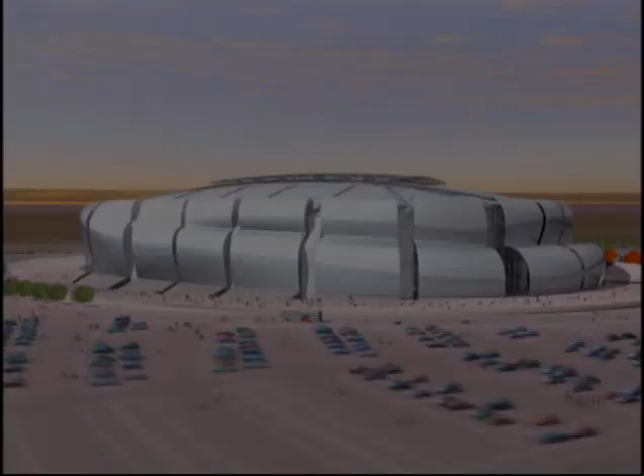In the summer of 2006, the Arizona Cardinals Football Club will open their season in one of the most technologically advanced stadiums ever built. With a bold, modern design, including a retractable roof and a roll-out natural grass playing field, the facility will set the standard for football stadiums around the world. It's going to be like nothing else in this country as a stadium, as a piece of architecture.

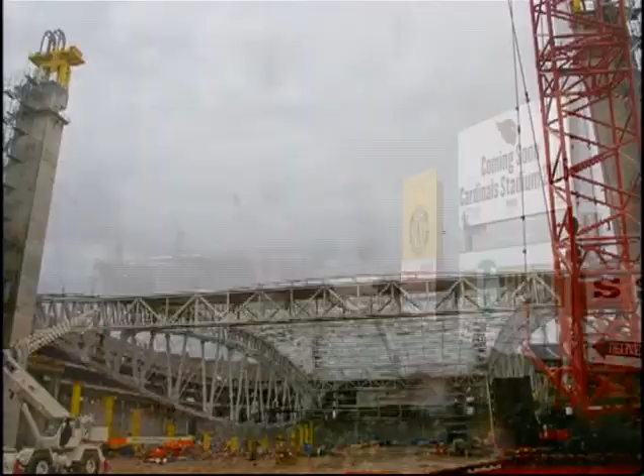In February of 2005, with the stadium nearly halfway complete, Hunt Construction Group was faced with the giant task of raising two massive Brunel trusses, nearly 200 feet in the air. All right, we're lifting, fellas. The trusses, with a combined weight of 11.2 million pounds, form the backbone of the roof. It's in good shape. That is one hell of a structure out there.

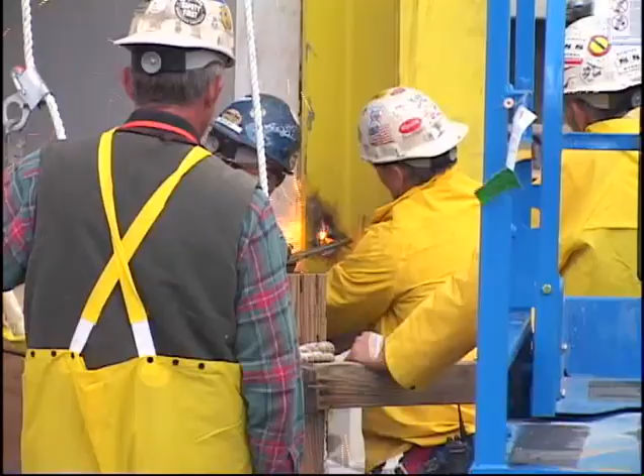Over 5 cold and rainy days, a handful of engineers and ironworkers descended on the West Valley of Phoenix to attempt what would be the largest roof raise in North American history.

Today is the beginning of a new era. The landscape changes. We begin building an icon for our state. Today, Arizona wins. As the oldest continuously run professional football franchise in America, the Arizona Cardinals have never had a stadium to call their own.

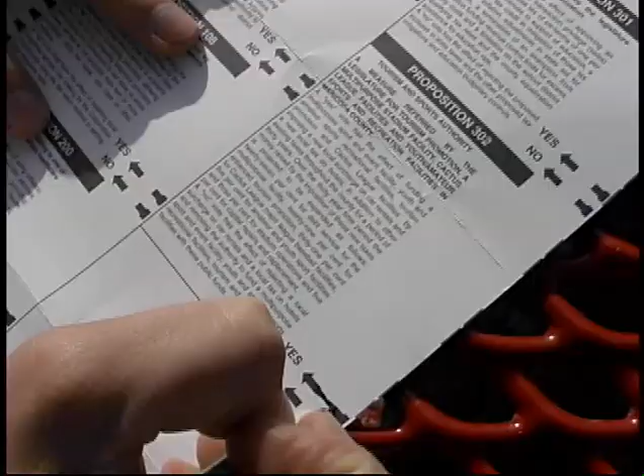In 2000, the Cardinals scored a major victory when Maricopa County voters passed Proposition 302, which increased hotel and rental car taxes to help fund the stadium project. While the funding became a reality in 2000, the vision for a new stadium began to take shape a few years earlier. In 1997, Cardinals ownership Bill and Michael Bidwell explored the possibility of retaining an internationally known high design architect for their future stadium project.

And their search uncovered Peter Eisenman, not only one of the most influential architects of the 20th century, but a passionate football fan. I didn't know anything about all this going for a high design architect, right? Some guy called me up, said, "You remember me?" I didn't remember him. He said, "Are you interested in football?" Right? And I said, "Yeah, I'm interested in football. I'm going to 2 games this weekend."

He said, "Uh-huh. Well, I represent the Arizona Cardinals, and this is the 50th anniversary of their championship." And I said, "Hey, I saw those guys play, and I can even name you the backfield," right? And I did. I named the backfield just off the top. I don't know how I did it, but I went boom, boom, boom, boom, boom, like that.

The next day, this guy calls me back, and he said, "Can you be in Cincinnati on Sunday to see the Cardinals and the Bengals game?" And I said, "The Giants are playing at home." And he said, "Yeah, but the owners would like to meet you." I said, "Yeah, I'll be there."

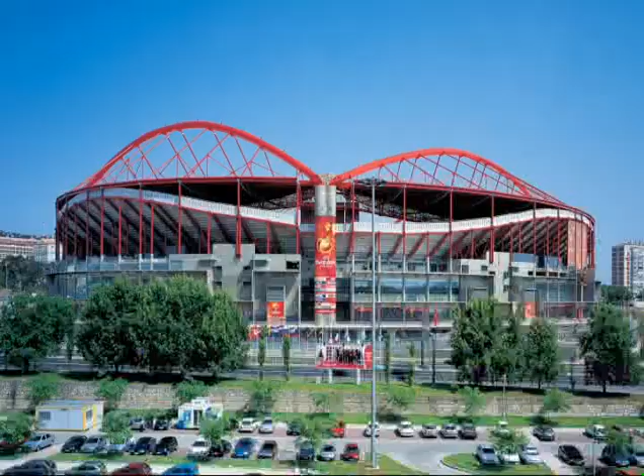As the project evolved, the Cardinals expanded the design team by retaining the services of HOK Sport, the renowned sports architecture firm that has designed more NFL stadiums than any other firm. HOK has been at the forefront of the shift from the cookie-cutter multi-sport stadiums of the 60s and 70s to the more sports-specific stadiums of today.

In the mid-60s, there was the idea, because cities had 2 professional sports teams, that they could coexist, and for a while that worked because the city then had to spend its dollars on one building, and since the seasons didn't overlap to any degree, that worked. But with the needs of each specific sport, really purpose-built buildings, ballparks for baseball and football stadiums for football, really became a necessity for a variety of reasons.

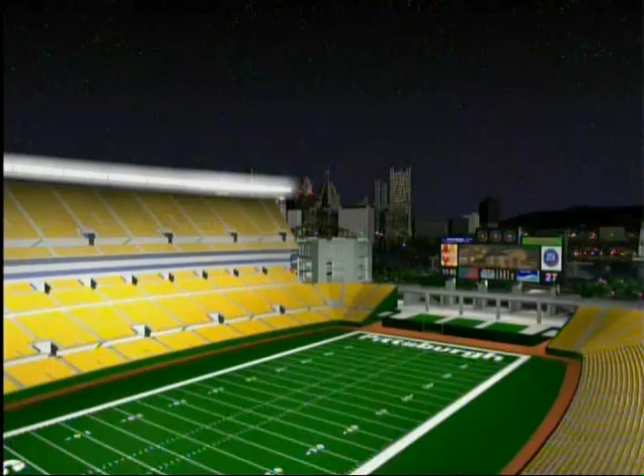Contrary to stadiums of the past, designers of modern venues have set out to create structures that do more than just accommodate thousands of people. Rather, they're seeking to create buildings that are a reflection of the city and the teams they're built for. With this concept in mind, the Cardinals set out to build a stadium that would not only reflect the unique beauty of the Arizona desert, but be a significant and enduring contribution to the ever-evolving urban landscape of the Valley of the Sun.

What we as architects are very, very concerned about is that our buildings are in fact contributions to the culture of the time, that they're not just an attempt to remember a kind of fictional golden age, but they make today special and important. While Eisenman's design has a modern look and feel, elements of Arizona's Native American culture and unique desert landscape are evident in the stadium's exterior shape. He drew inspiration from two common features of the Arizona desert, the barrel cactus and the snake form.

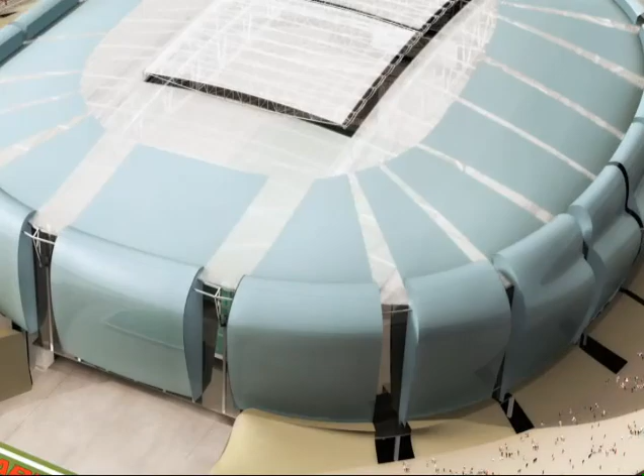When you see the stadium, it ends. There's this end, and then the thing radiates around and gets flatter, gets thicker and flatter. That's the residue of the snake form, and incorporated with it is a mandala form, which is a center radiating out. So these spokes are like a mandala or a spiky cactus, any kind of organic form that radiates from the center.

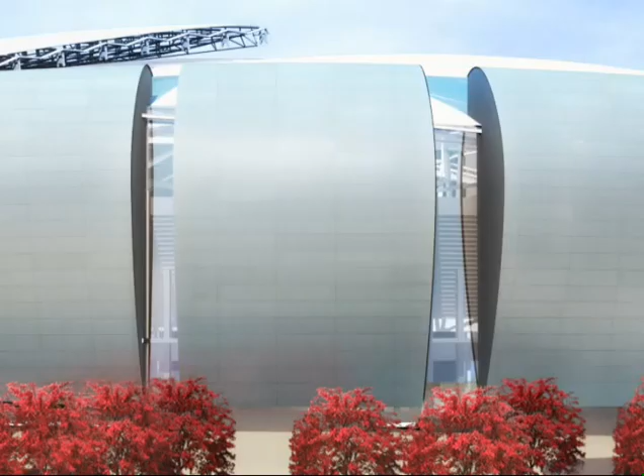One of Eisenman's primary challenges was to have a high design concept throughout the project without interfering with the fan experience. He was able to accomplish this by using a unique exterior that features alternating metal panels intended to reflect the shifting desert light alongside magnificent vertical glass slots, allowing patrons a spectacular view of the horizon from any level of the interior.

Between my seat and when I leave my car, that's where architecture comes in. And I think from this stadium, you can be both inside looking in a concourse, looking at the game, and looking out at the buttes and the mountains. I think that's a great feature. Not many stadiums have that possibility.

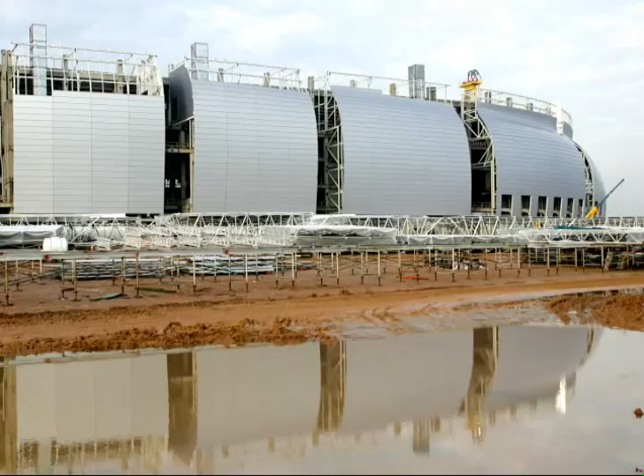During the early stages of the stadium's metallic skin installation, its unique reflective nature was already apparent in many ways. Depending on the angle of the skin, it's very reflective of a gray day, a bright sunshiny day with the blue sky, or if there's a tremendous amount of vegetation, there'll be a greenish tint to it. Sunset, you'll find a different color to the building, so it's always changing. It's a little more organic in that sense, and it's somewhat alive.

In addition to the exterior skin, the retractable roof was another major component of the design. While recent stadiums have incorporated retractable roofs, this design called for the roof panels to move along an arc, an engineering first. The operable roof is the second one that we've done for an NFL building, Reliant being the first,

but this takes some steps which are different. It would have been easy just to repeat sort of a flat roof, flat tracked approach. The operable portion of the roof takes more the shape of the building itself, and so the panels actually flow down the sides of the building and then together in the center.

Working on covered sports stadiums is nothing new for the structural engineering firm of Walter P. Moore. They were involved in the construction of the world's first covered sports stadium, the Astrodome, built 40 years ago, as well as two of the most recent retractable roof stadiums, Minute Maid Park and Reliant Stadium in Houston. In designing the trusses that would serve as the support structure for the movable roof in the Cardinals Stadium, Walter P. Moore drew inspiration from a 19th century engineering legend.

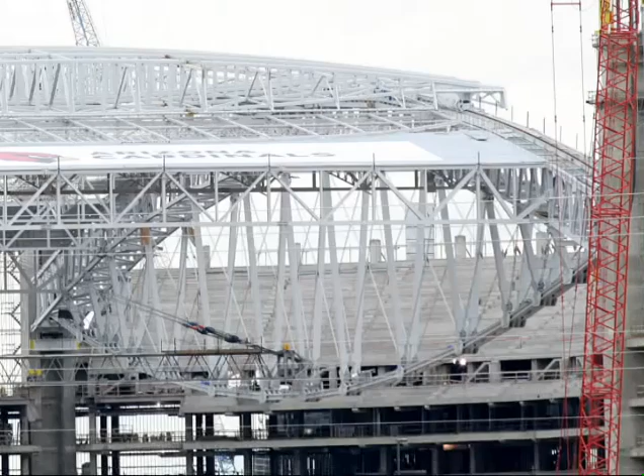Knowing some of the engineering history here, we noticed as this roof form was evolving that these trusses were very similar in shape to a bridge called the Royal Albert Bridge, completed by the very famous British engineer named I.K. Brunel in 1859 in England. So just to introduce a little sense of history into the project, we dubbed these the Brunel trusses.

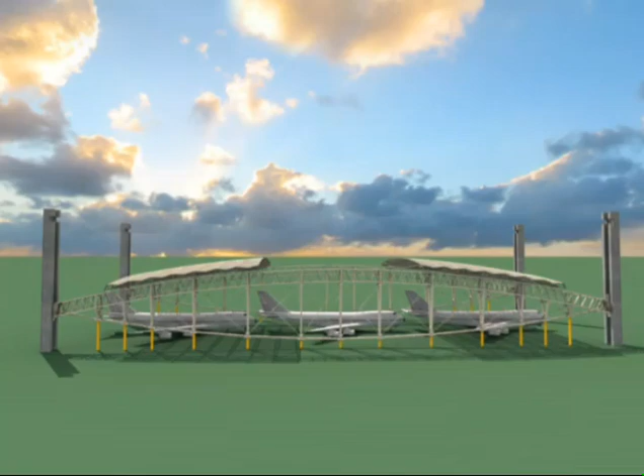The two Brunel trusses provide a rigid line of support beneath the tremendous moving loads of the retractable roof. They are lenticular in shape, similar to the shape of a football, and measure 87 feet at their tallest point. Over 700 feet long, each truss is just slightly longer than the length of 3 Boeing 747s. With the shape of the Brunel trusses, Walter P. Moore was able to create a roof support system that was cost-efficient and visually dynamic.

Engineers had to balance Eisenman's architectural ambition with physical and budgetary boundaries. The geometry of this roof system was very important to him, since all this structure is exposed, and when you're sitting there, at halftime, if you don't like what you see on the field of play, your eyes are looking up and you're looking at the structure. He wanted that to be a pleasant experience, and he wanted it to look right.

A lot of times the aesthetic vision has to go through a process of reconciling with the physics of having a 700-foot long span roof, and also some of the functional considerations of the stadium venue itself. The primary driving element on the Brunel trusses is how deep they are at the center. That really drives the economy, and where we ended up was at an 87-foot deep truss that allowed the aesthetic vision of the architect to have a fairly low profile roof on the top. It has enough depth for us to design an economical truss, but yet keeps the bottom element out of the sight lines of the bowl itself.

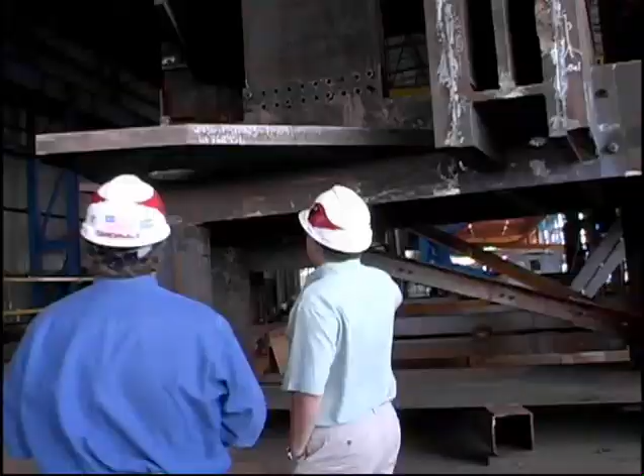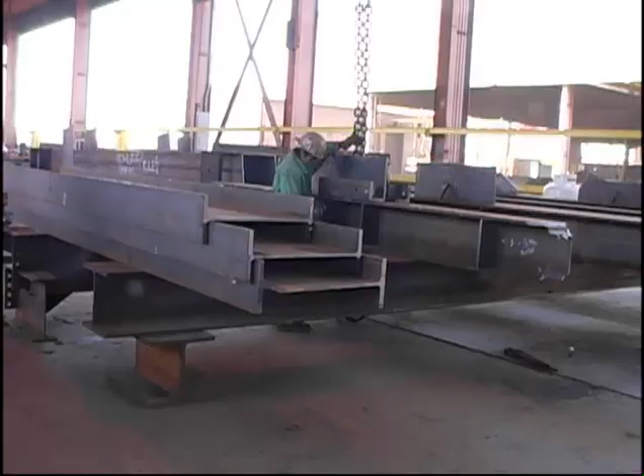The next step in the assembly of the roof support was the acquisition and fabrication of the steel used to construct the Brunel trusses. Designers targeted a specially milled high-strength steel made by Trade Arbed of Luxembourg, one of only 2 companies to produce this type of steel worldwide.

Engineers like to use that in long-span structures like this because they get a savings for strength versus weight. So for the same weight as a non-high-strength steel that would be, say, produced domestically, they can carry a lot more load over a certain distance. So there's obviously a price premium, but overall there's a big tonnage savings. And in any long-span structure, especially one of this complexity, you want to keep that weight down to a minimum.

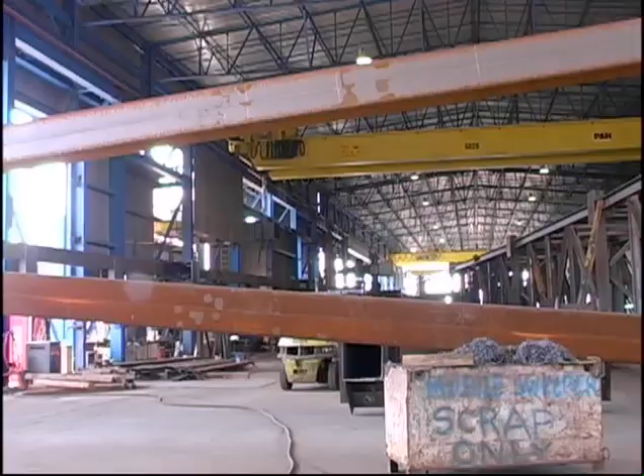Phoenix's Schuff Steel, the project steel fabricator and erector, began to assemble the trusses in 20 by 20 foot sections at their own facility before transporting the sections to the stadium site. Once at the site, the sections were welded together atop temporary shoring towers on the stadium floor. Assembling the Brunel trusses on the ground dramatically improved efficiency.

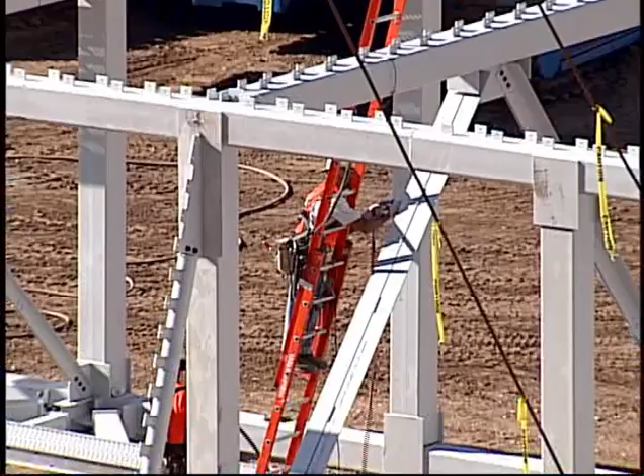If you were going to build it in the air, you had to have much more of the concrete structure in place to support the shoring towers and the ends. So what we looked at was a way to get about 60% of the concrete work in place, get one end of it up and out of the way, let the 2 Brunels start from the north end and work their way to the middle, while we were finishing the concrete work at the south end. So building them on the ground made a lot of sense. We got started probably 3.5 to 4 months earlier than you would have done it if you were waiting for the entire concrete frame to start.

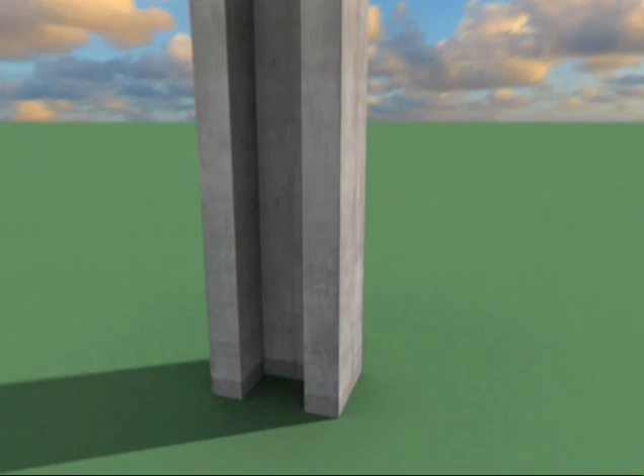The support system for the 11.2 million pound roof assembly consists of 4 high-strength concrete super columns, one at each corner of the stadium. Each column measures 171 feet tall, 17.5 feet wide, and nearly 12 feet deep. The dimensions of the columns required 1,050 cubic yards of especially mixed high-strength concrete.

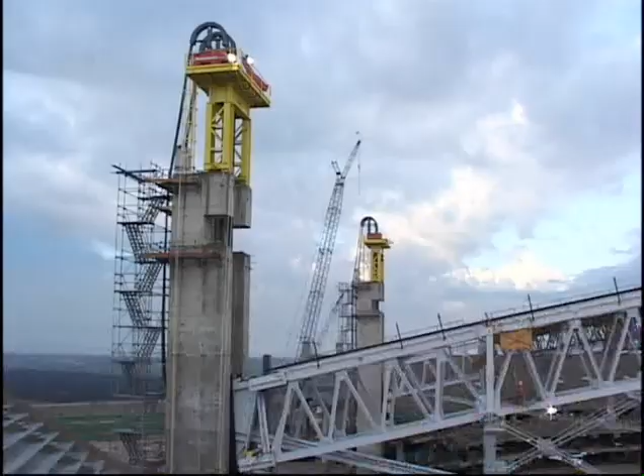As the structural engineer of record for the concrete work on the project, TLCP oversaw the design and construction of the 4 super columns. We use a 7,000 psi strength concrete, where typically residential construction would be more in the 2,500 to 3,000 psi. So it's a high strength mix to give us the strength that we need to provide the support for this lift and for the serviceability of the building.

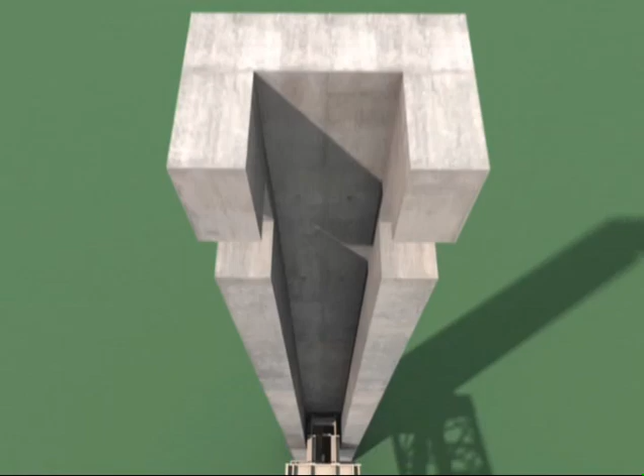The super columns were engineered with the roof raise in mind. Designers incorporated a channel which runs the entire 171-foot height of each column, allowing the Brunel trusses to have an unobstructed and guided path up the columns to their ultimate position, 156 feet above the stadium floor.

The super columns are designed actually to support the lift. That's why the notch is in the super column, to allow the Brunels to be lifted to the overjack position. And the notch is there, then the support girders will be slid into place. And once they come down, sit on the girders, then the columns are there for the service support, or the support of the roof for the life of the building.

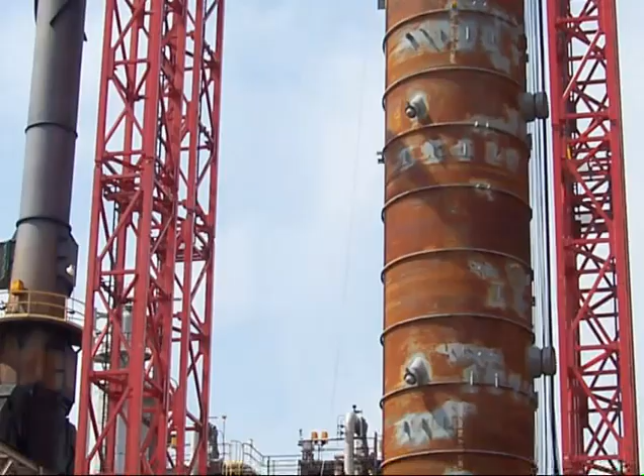The company contracted to perform the lift of the Arizona Cardinals Stadium roof assembly is Mammoet, a Netherlands-based firm that specializes in lifting and transporting heavy structures. Overseeing the lift for Mammoet is Jack Toll, who has worked on several similar projects throughout the world. Actually, we have it pretty easy on this job. Our responsibility is just to go up with it. It's the other companies that are involved that monitor the deflection of the roof, the super column deflection, that have an influence on what we do.

Mammoet gained worldwide acclaim for its role in the retrieval of the Russian nuclear submarine, the Kursk, which had sunk to a depth of 108 meters on the floor of the Barents Sea. The centerpiece to the successful salvage operation was Mammoet's advanced computer-controlled strand lifting systems, designed for safe, precise, and heavy lifts. Mammoet plans to use the same system to lift the roof assembly for the Cardinals stadium.

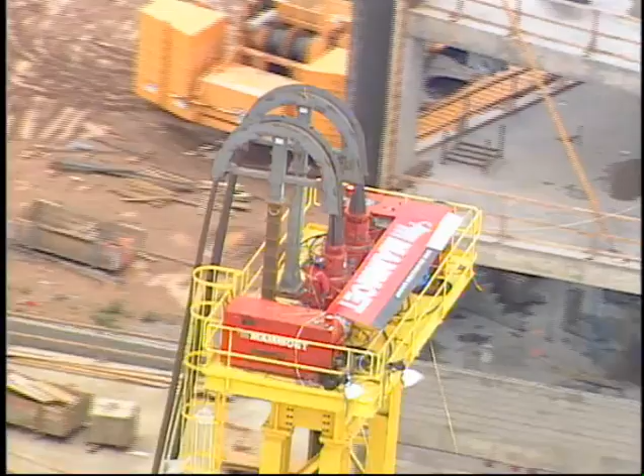The strand jack is a hollow hydraulic cylinder that uses a gripping system consisting of wedges and cables to lift or lower massive objects. The jacks on this project contain 54 tubes, each housing an individual steel cable called a strand. Attached to each strand are two gripping wedges located at the top and bottom of the cylinder. The gripping system is similar to the hand-over-hand motion used to raise a pail of water from a well.

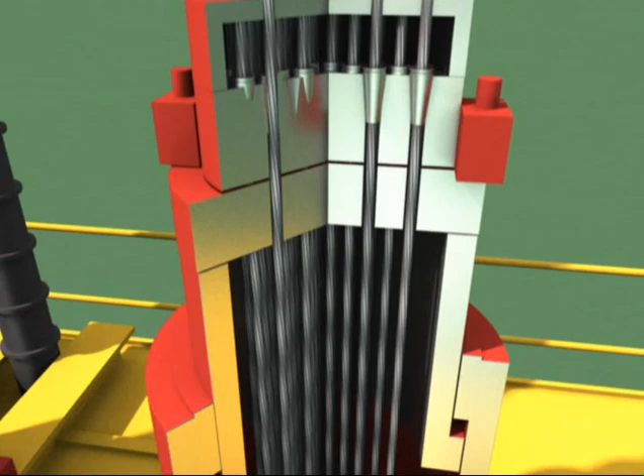When lifting, the hydraulic cylinder extends, forcing the top wedge into a cup, causing it to tightly grip the strand. As the cylinder expands and completes its stroke, it raises the strand and the object that it's attached to. At the end of the stroke, the bottom wedge is engaged, securing the strand, while the top wedge is released, allowing it to be repositioned for the next stroke.

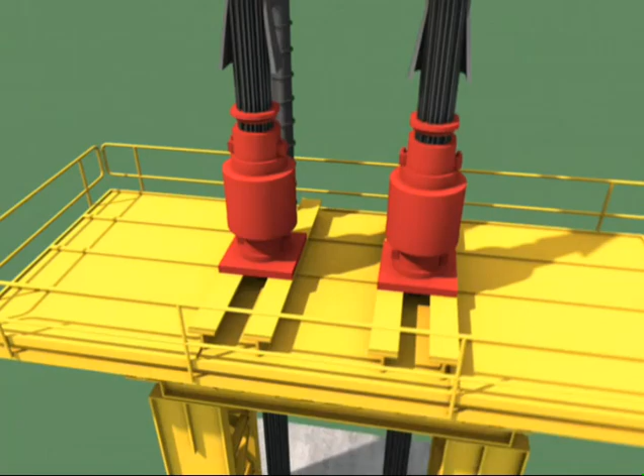Each super column, and there's 4 total, contains 2 strand jacks. Each have 1,000 US ton capacity. The roof is estimated to weigh 5,500, and we have 8,000 ton capacity, so there's plenty of safety margin in it. Each pair of strand jacks is mounted upon yellow temporary jacking frames atop each super column. The 3-day plan calls for all 4 corners of the roof assembly to be raised at a synchronized rate from their initial bearing point at the main concourse level to the notches near the top of the super columns.

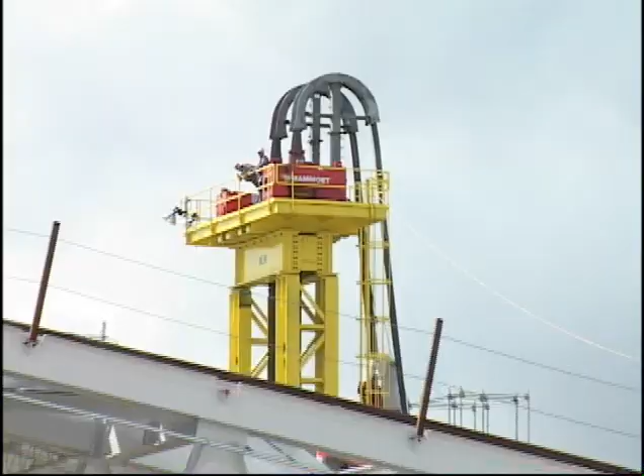Once we get the go signal, our operator will use a computer that drives each jack separately and keeps control of each jack. And the computer makes sure that each jack will not stray from the other jack. At the controls of this monumental lift is Jason Marks, who is positioned with a laptop computer inside of a small room on the upper concourse of the stadium. From his laptop, Marks is able to monitor and control all 8 jacks simultaneously.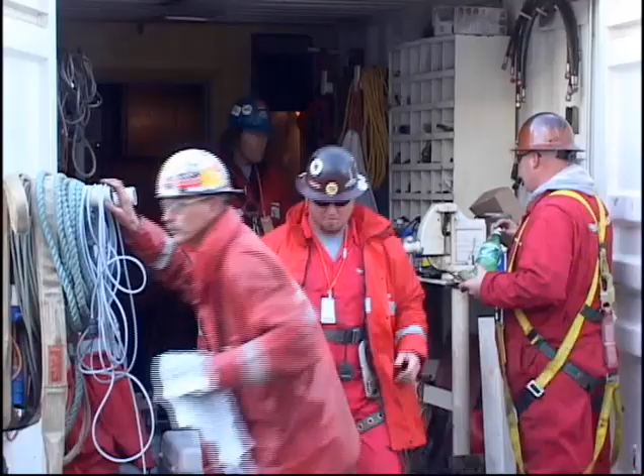His job is to raise all 4 corners of the roof assembly in unison to ensure a balanced and safe lift operation. While the cozy control room shelters Marks from the elements, it does not protect him from the creative nicknames that his co-workers have given him. I've been called all kinds of things. Because a lot of times when we're putting things together, hanging jacks, cutting wire, working, it's all different. But when it's time to get in the box and everybody starts giving me a hard time, call me box boy, mouse boy, the trained gorilla, I've heard it all. They'll come in there and walk by and throw me bananas, tell me to push the button.

Mammoet's technical expertise is not the only reason that their work is known around the world. Wearing their trademark bright red jumpsuits, their crews stand out from the typical construction crowd. With an eclectic mix of international personalities, Mammoet crews leave a lasting impression on those they work with. They're all in their red jumpsuits, and they kind of appear on the job site, and they're here for a couple of weeks, and then all of a sudden they pack up their stuff. They're kind of like a really high-tech circus comes to town. Very good group of guys. They work all around the world.

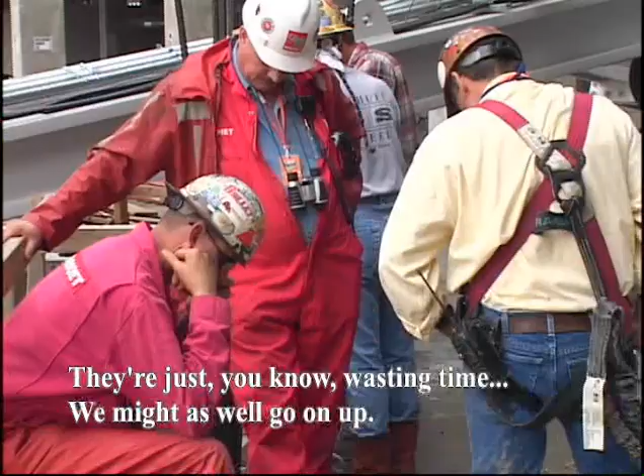They looked at us kind of like we had 3 heads once in a while, and we talked about the things we were planning for. And to see us sit down here trying to calculate inches of movement, and all they wanted to do was pick it up. And I said, why wait? They're just wasting time. We might as well go on up. I understand, you're preaching to the choir. Just hang in there for a little while longer. From the beginning, this is clearly what they do. They have the technical expertise. We couldn't be happier with Mammoet. They were everything we thought they were and more.

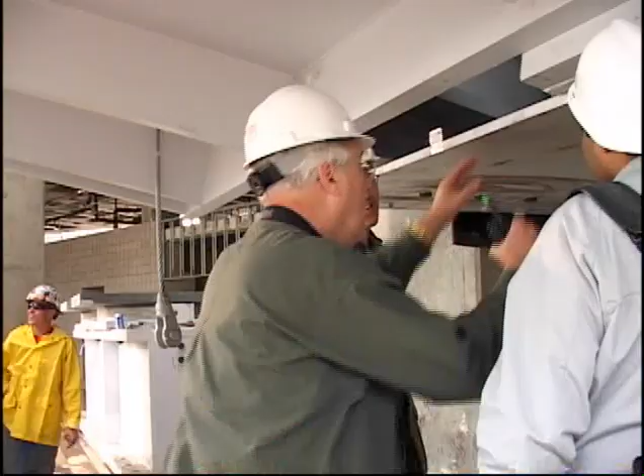As the general contractor for the project, Hunt Construction Group assembled and coordinated the efforts of the various subcontractors working on the roof lift. With over a half-dozen subcontractors involved, careful planning was essential. One of the major objectives of the 13-month planning process was to prepare the lift team for all the potential scenarios that could arise during the operation. You can read a lot of the trade journals, and you know that some of these that have gone up haven't gone so well. We pride ourselves in working with the fabricator, the erector, and the general contractor to plan an event like this and play the what-if game and try to anticipate all the problems that could come up and then get solutions for them and have them thought out ahead of time.

There's no question that of all of the long-span roofs around the country we've been involved in, this is one that has been planned in more detail than any other, and I think this project will probably set a new standard for that. Officials planned for communication flow and chain of command procedures to filter through a control room located on the upper concourse of the stadium's north side. Inside the control room, representatives from each of the key subcontractors could monitor critical data and relay instruction to field personnel during each step of the lift process.

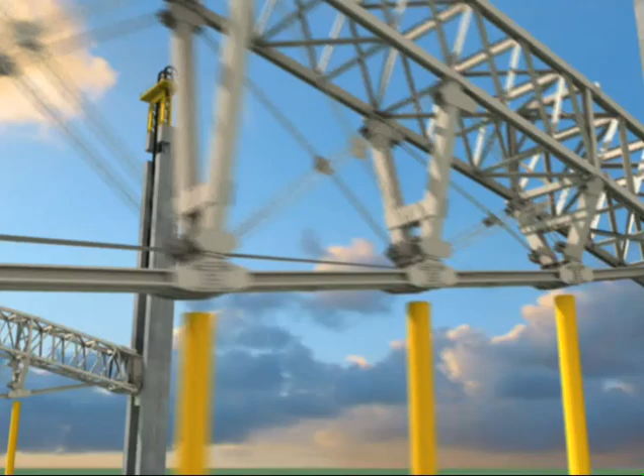The first step in the lift operation is to raise the roof assembly from the yellow temporary shoring towers, allowing the Brunel trusses to be fully suspended. Then the roof will be raised approximately 7 feet in order to attach transfer girders to the ends of the Brunel trusses. The third step is to lift the roof assembly with the attached transfer girders to the overjack position, slightly above the notches in the super columns. Next, workers will swing the transfer girders into the notches in the super columns. Finally, the roof assembly will be lowered to rest upon the transfer girders and be welded into place.

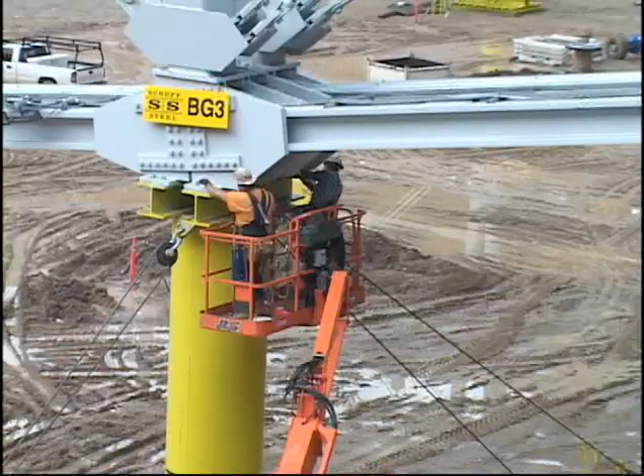First day's activities will start out down at field level. On a daily basis, I've got 5 gangs. We're calling them quad gangs, A, B, C, D, and then a roving gang. As Director of Field Operations for Schuff Steel, Ron DeBenedictis, a 32-year veteran of the industry, would lead a group of 50 iron workers during the roof lift. Their first task was to remove the bolts that secured the trusses to their temporary shoring towers, while detensioning the guy cables that held the shores to the stadium floor.

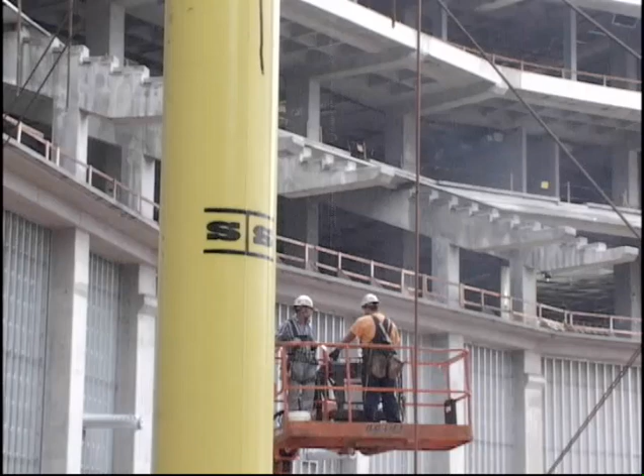Once we've removed all of the bolts, the nuts, the washers, and the guy cables, and Mammoet begins the lift operation, we're going to be clearing the first shore towers, and those are at the extreme ends of the end zones. At approximately 10 a.m., officials completed their final safety checks and determined that it was clear to commence lift operations. With the lift underway, the roving gangs positioned themselves at the outer edges of the trusses to look for evidence of separation from the shoring towers.

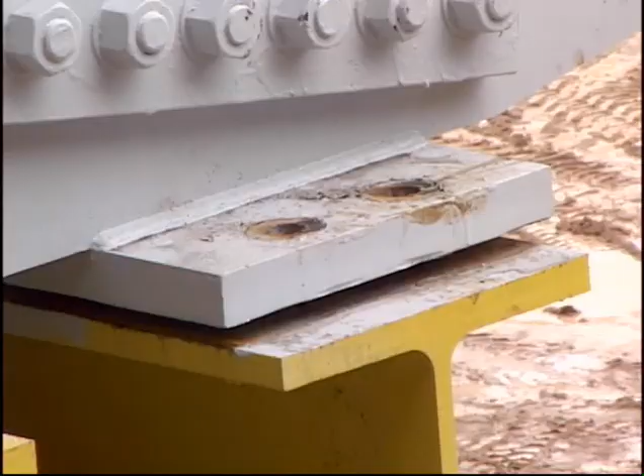Wes, how much daylight you got over there? We're going to start working your jacks. 3/4 on the east side, 3/8 on the west side. All right, we're going to call that good. Once we clear daylight, the engineers and the consultants up in the control room will perform some inspections and some monitoring activities, and once we get the all clear, we'll repeat the process over and over again until we've cleared the final shore towers at the center or the 50-yard line. Yeah, let's move over to 2.5. You guys that are observing, start looking to break loose on these next shores.

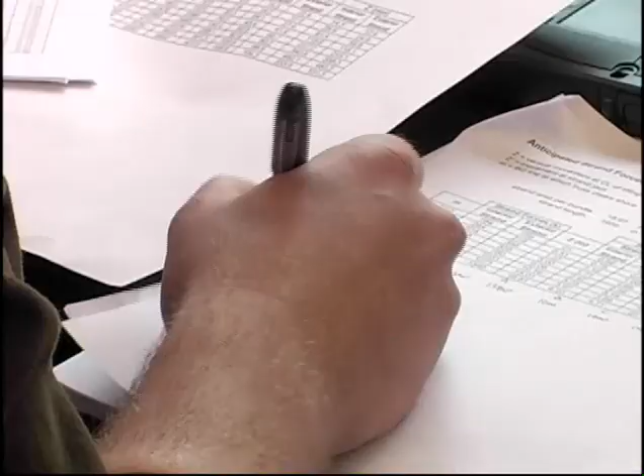Clearing the shoring towers was a time-consuming process, as engineers were intensely calculating the first movements of the trusses. All right, we're waiting for these guys to crunch the data up there. They'll give us the word when they're ready up in the control room, and then Dave will be doing his thing again here. They wanted to make sure that the roof assembly was moving in a manner that was consistent with their projections. And we expect to see about 16 inches of movement at the far ends of the jacking operation before the center of the truss ever comes off.

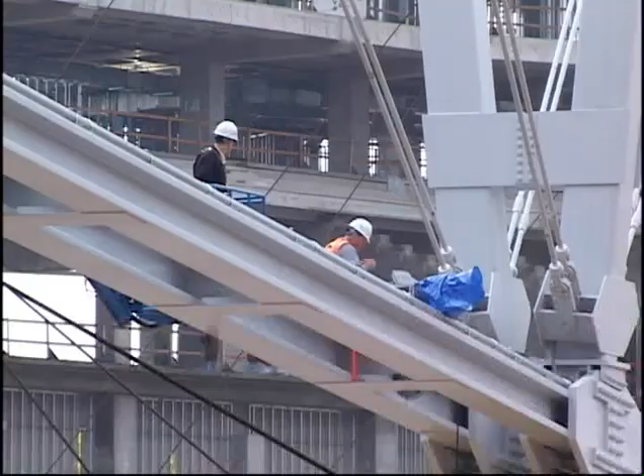Even though the Brunel trusses and the super columns are extremely rigid, engineers predicted that both structures would show movement as they assumed the weight of the lift. They expected the trusses to sag in the middle, while the super columns would deflect inward. In order to ensure that the structure was behaving within its limitations, engineers were analyzing data relayed from monitoring devices placed at strategic points on the trusses and super columns.

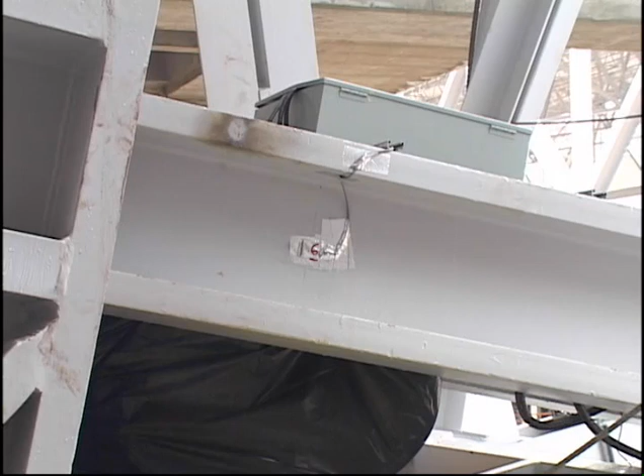The monitoring has been set up via strain gauges and deflection monitors. We're getting constant feedback from the strain gauges, and every so often we'll get deflection updates that tell us how exactly specific points on that truss are reacting as we pick it up and move it off of the panel points. A strain gauge measures the amount of stress that is placed upon the steel members of the Brunel trusses during the lift operation. 76 strain gauges will be utilized during this lift.

Okay, I've been told to hold off for a little bit to check in the strain gauges. It's got a grid system on the gauge that when the gauge is actually strained or pulled in tension, those little wires neck down and change the resistance of the gauge, and therefore the data acquisition system can actually measure that change. Engineers in the control room could measure the deflection of the trusses and super columns by analyzing data acquired from a system of 2 survey stations located on the stadium's upper concourse and 56 precision targets placed on the roof assembly and super columns.

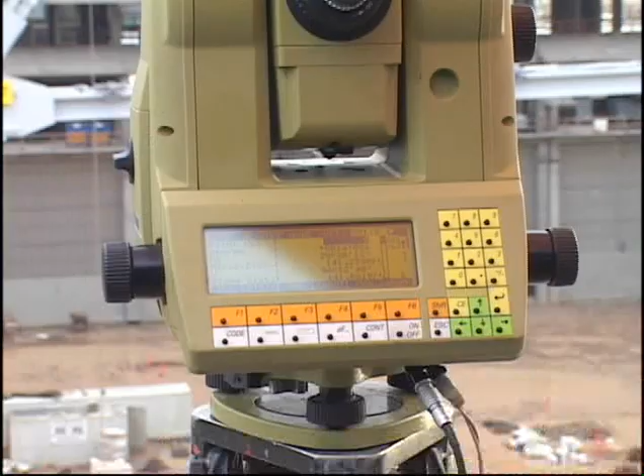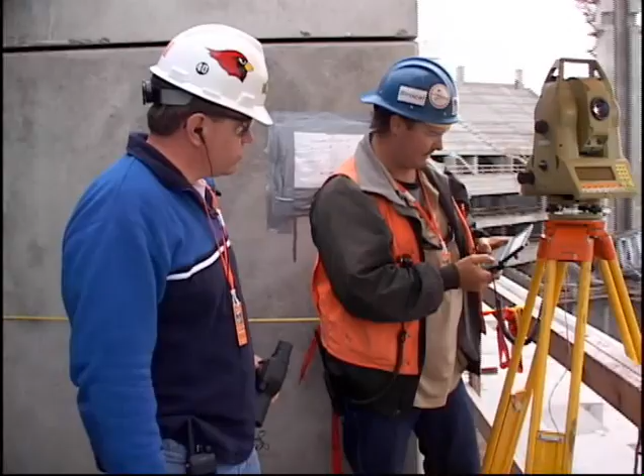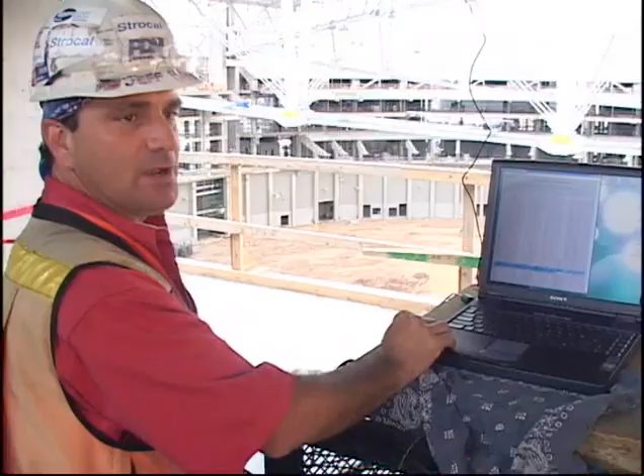We've applied what we call prisms, and we use an instrument called a total station to measure the distance between each of those prisms and calculate back what the truss has moved. We zoom in and we get a reading. We established a baseline when the Brunel truss was in the relaxed position on the floor, so that we can tell deflection and elevation from that. We're just monitoring it to make sure that it moves as a unit as opposed to moving independently, making sure one corner isn't going up higher than the other corner, and that we get a nice consistent lift. They have their model of where it's supposed to be, so they can take our information, plug it right in, and get real-time data on the deflection and on station and offset.

During the early hours of the lift, engineers continued to monitor and analyze the slightest movements in the trusses. They realized that this would be a critical time period as the roof assembly continued to take on more of its own weight. That's where all the observations, inspections, and monitoring is going to occur, and that's where we're likely to find the noises, the sounds, the creaks, the groans, the popping sounds that are natural. You hear that whenever you flex steel, and as large as the structure is, you're going to hear some of that. So you're looking all right so far, huh?

While the popping sounds emanating from the roof assembly were anticipated, veteran ironworkers felt a heightened level of anxiety as they worked inches away from the shifting steel. Daylight all the way around. Daylight on quadrant all the way around.

I got my pants. It's a good thing you're by yourself. Ain't nobody getting near you.

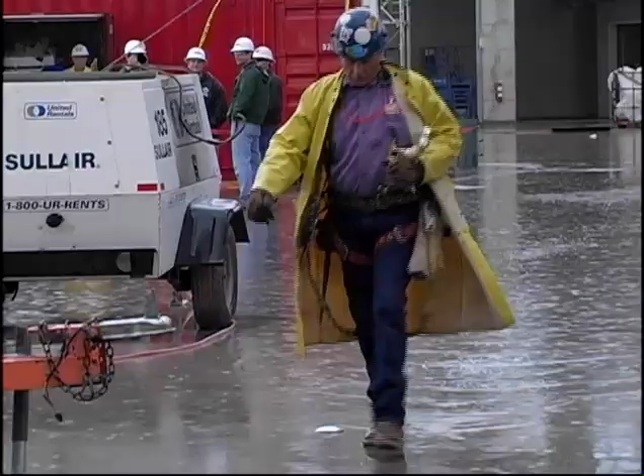As the lift operation progressed into the afternoon, steady rain began to fall, which proved to be nothing more than an inconvenience. The weather would have no adverse effects on the strand jacks, the same jacks used by Mammoet in the Kursk salvage operation. Rain is absolutely no problem. The equipment is fine. It was in the Barents Sea with big waves going over it and all that. This equipment has seen a lot worse than what Phoenix can throw at it.

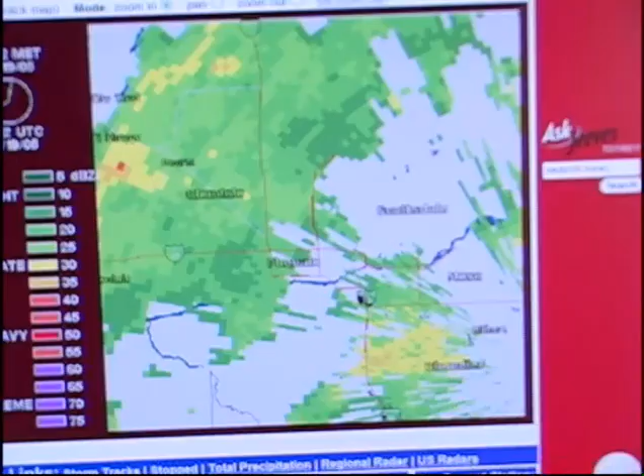The weather may have had little impact on the equipment and the engineers in the control room, but ironworkers had to labor through Mother Nature's ill timing. Look at that. I knew as soon as our shift started, it started raining. The weather's definitely affected the guys. They're kind of in more of a hurry to get this thing over with. They're a little wet, but it is the second shift and they're coming on fresh, so they've got a good mindset to get this thing in and done and behind them.

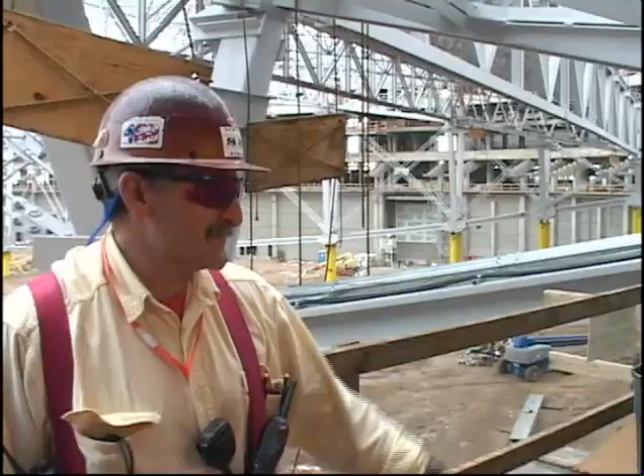As they battled the elements, the trusses continued to inch upward, and the ironworkers turned their attention to the installation of the transfer girders. We're looking to come completely off of the shores, and then we'd like to go to 7 feet above this main concourse and be able to take the transfer girder assembly and slide it underneath the end assembly, lash it on the end of the end assembly here on the pickups, and be prepared for tomorrow to be able to continue on up with the lift.

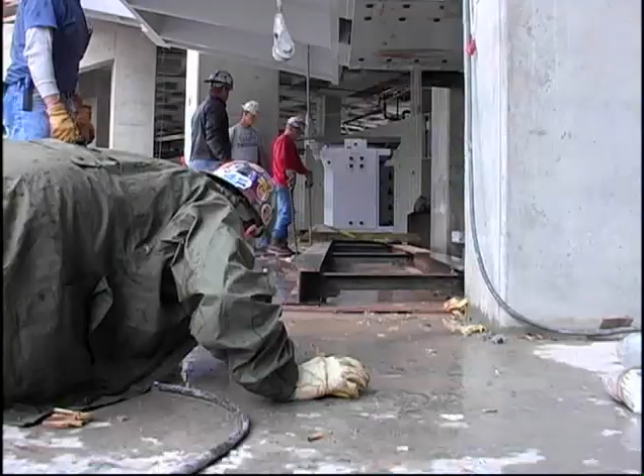After 5 hours of lifting, the trusses had enough clearance for the ironworkers to construct a track system to move the 20-ton transfer girders under the end assemblies. Once the girders were under the end bearings, they were attached to trailing cables hanging from the trusses. With the girders securely in place, the sun finally set on day 1 of the lift operation.

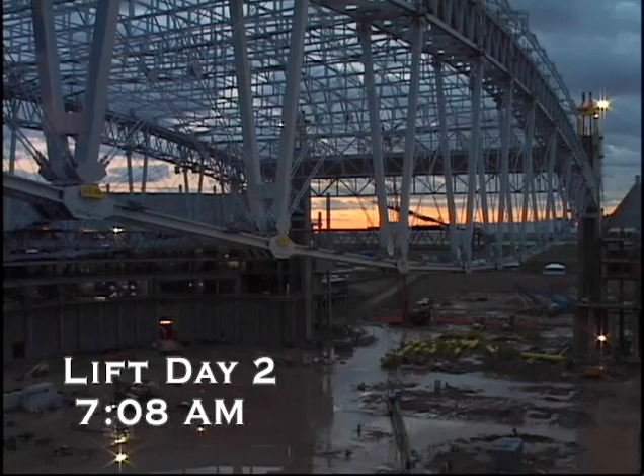Weather we're going to have to contend with today. We need to watch our step. You guys stay in real close communication with your foreman, with each other. Steady rain fell throughout the night and into the morning of the second day of the lift operation. While movements came slowly on the first day, engineers plan to cover more ground on day 2. We'll probably start out fairly slow, and if everything's going well, we'll crank up the speed and go a little faster. Probably at the most we'll go about 20 feet an hour. It's still going to be extremely slow and pretty boring.

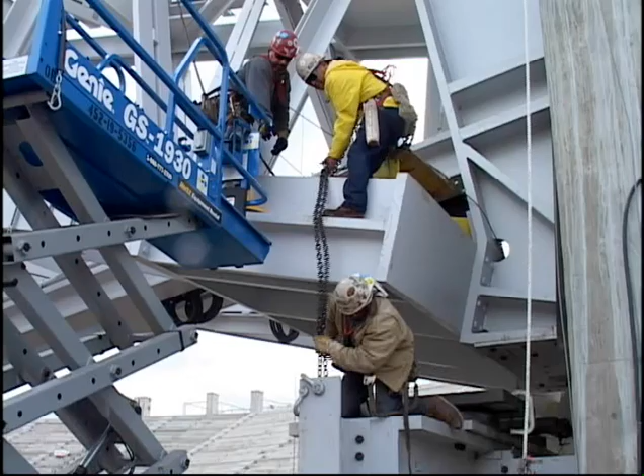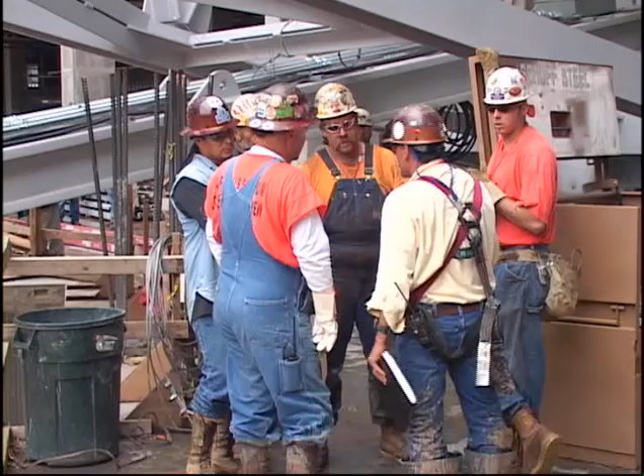While much of the lift is monotonous to the casual observer, the ironworkers are in constant motion. With the lift progressing smoothly, ironworkers moved into the next phase of their plan. They needed to attach mounting hardware for chain falls and come-alongs that would be used to swing the transfer girders into place once they reached their final bearing points in the notches of the super columns. Experienced ironworkers make this type of operation look simple. However, working with this many moving parts in this type of environment can be dangerous and requires exacting precision and teamwork. We need to stay safe, so keep an eyeball on each other, take care of each other up there.

Any successful team relies on the experience of their leaders. According to the ironworkers, there's no better leader in the business than Schuff Steel's Ron DeBenedictis. Throughout his long career, he's earned the respect and the admiration of everyone who's worked with him. He's a unique type of guy. He's a real hard pusher. You guys need to be aware of how this blocking is. There's 2 blocks on each side. He's got a great personality. He's a real joker. Not afraid of a prank.

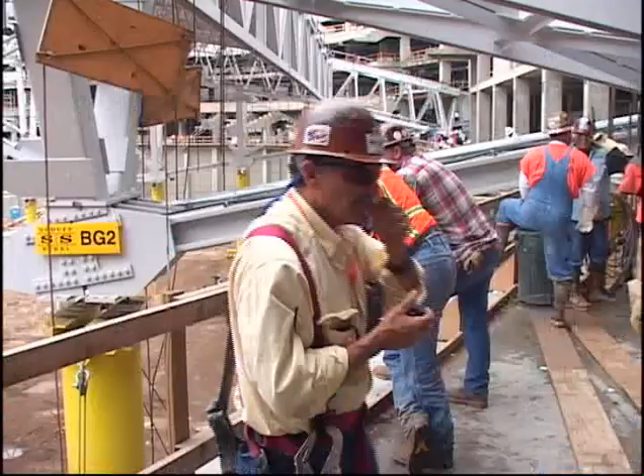Did you clean everything up last night? Oh, that was it. Yeah, okay, sure.

Yeah, right. I've worked with very few with the knowledge and the experience that he has. And he's a good person to work for, too. You got those guys give you those ideas, this is how we should do it. Well, everybody thinks they know how to do something. Ron's pretty much done it. His way is the right way. That's why there's no problem there. This is a prime example right here. A whole bunch of guys teaming up behind a real good plan from somebody who knows how to plan.

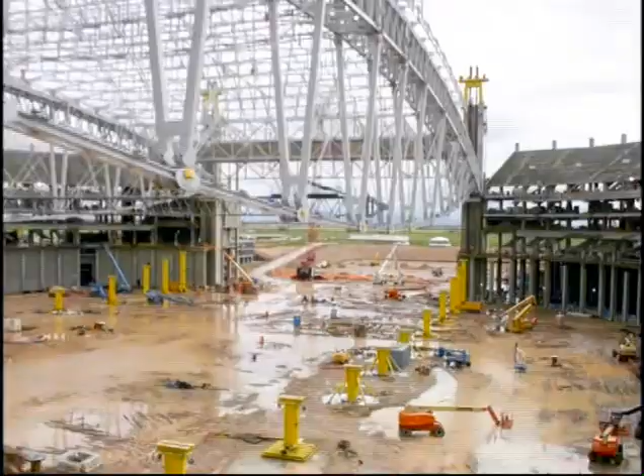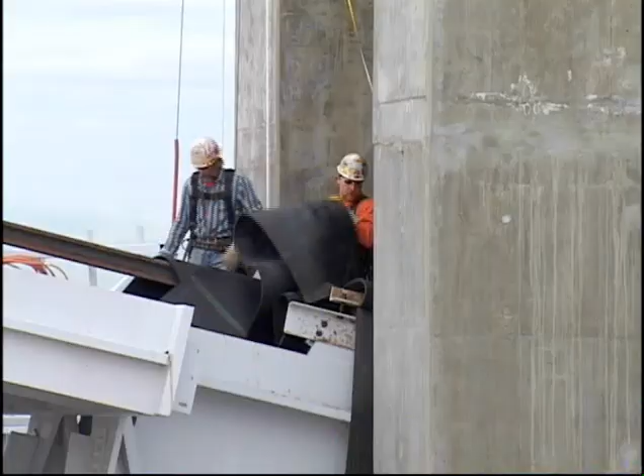As the roof assembly neared the halfway point, Mammoet's technicians noticed a malfunction with critical pieces of the lifting mechanism and were forced to stop the lift. Mammoet has run into a problem down on Quad C where their wedges that run the cable strands, they've had some failures, so they're going to go and replace them. It's not an uncommon situation, but being that it's late in the day, the amount of time it's going to take to do the lift for the rest of the day, we've decided to block off the truss and block the roof in for the night, and we'll return in the morning and go back to work.

Mammoet's technicians determined that a loss of traction between some of the wedges and the strands was a result of a bad batch of wedges. In the event they would need to replace all 864 wedges, Mammoet made the call to have a complete set of backups shipped overnight from their offices in Rosharon, Texas.

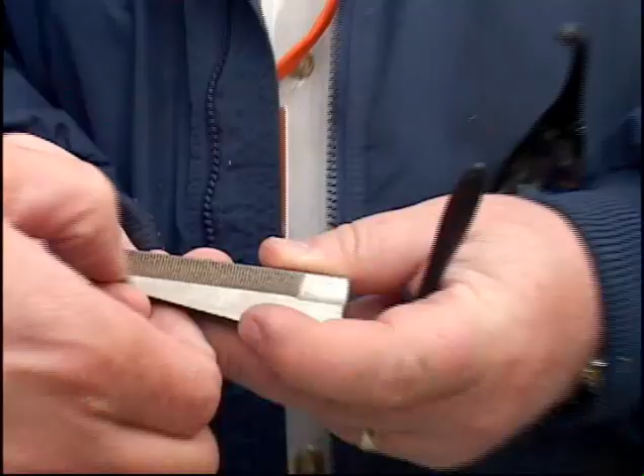Day 3 of the lift began with Mammoet technicians examining each individual jack and wedge for signs of wear and tear. We're doing maintenance on the wedges. That's the device that grabs the cable. And them things wear out. At this job, for some reason, they wear out a little quicker than they're supposed to. So we're just going to check them all and change them out if we have to.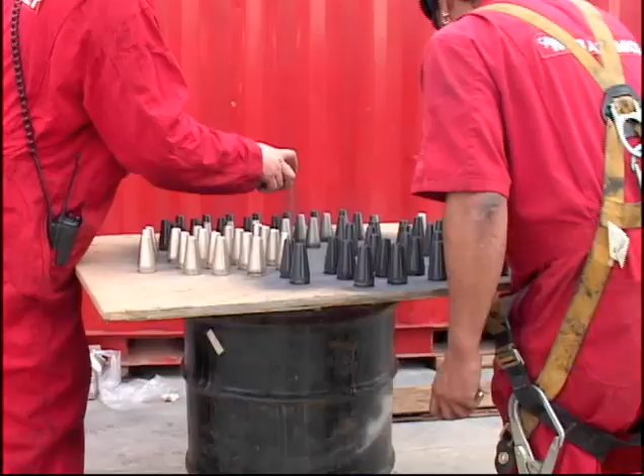So what we're doing today is the wedge itself. We're individually, one at a time, taking them out and inspecting them. And what we inspect for is the grip. It's basically the wear, a visual look that the technicians will see. If they see wear in it, then we're replacing the wedge. While the mechanics worked to identify all of the damaged wedges, other members of the Mammoet crew helped out by preparing the newly arrived replacements in case they were needed.

We had allowed for a contingency day, which was for maintenance or anything else, weather or wind or whatever. And so day 3 today is maintenance, and that's kind of going to fill our day. And we'll get that finished up sometime late tonight and be in lift mode tomorrow morning.

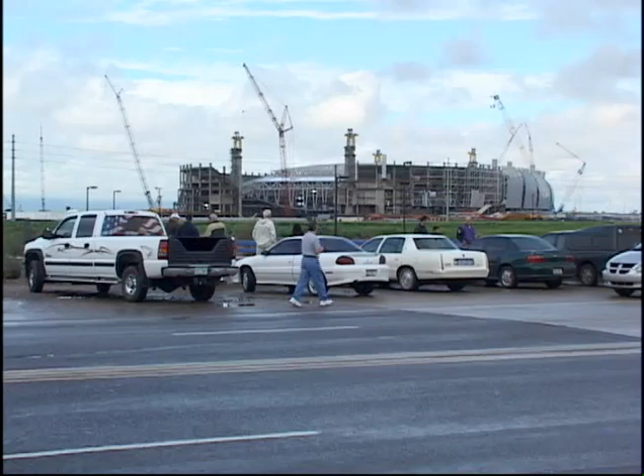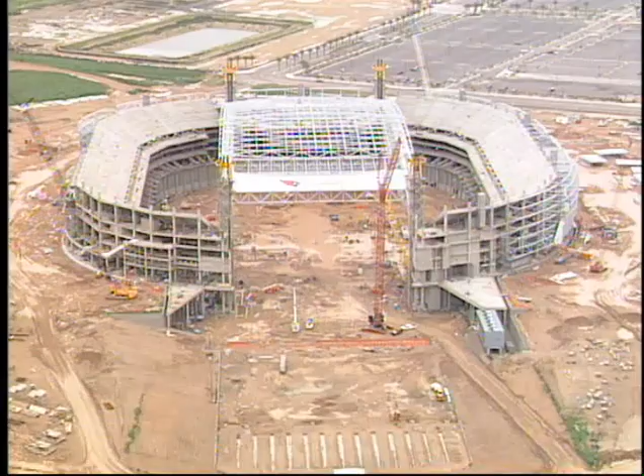The ongoing repairs put the lift operation on hold, but didn't stop onlookers from gathering outside to observe the historic event. This stuff just draws everybody's attention. It's a big deal for this area and the west side. I think it's kind of impressive. I had no idea it was that big. I saw it on the news, and we drove by and said, hey, let's take a look, and it's a lot bigger than I thought it would be.

Members of the stadium construction crew who weren't directly involved in the lift were also impressed and came out on their day off to observe the event. When you're working on it, you get a sense of pride of what's going on, and you want to see it work out. So you're kind of interested in seeing every aspect of it going up instead of just what you do.

You know, I really want to be one of the first people to be in there, I really do, because when you put all the hard work into the stadium to make it what it is and what it's going to be, you feel a lot of pride in what you've done. And you want to take your family in there and say, look, this is what we built. Meanwhile, back inside the stadium, Mammoet crews worked diligently into the night to put the finishing touches on the repairs with the hope of resuming the lift in the morning.

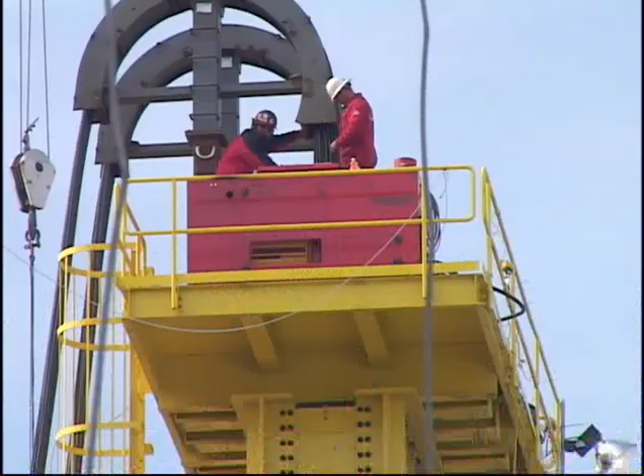We'll get into lift start. Everybody go through their checks, and then Mammoet can proceed, and we'll go to 156 and then above. We're looking at going over jack. Yesterday's maintenance day went very well. Mammoet changed out a number of wedges on a number of their jacks, and everything went smoothly. In fact, they finished ahead of schedule. They started early in the morning at daylight, and were done by about 8:30 last evening.

With the maintenance issues taken care of, lift operations resumed and slow and steady progress was made over the next several hours. As the truss neared its final destination, ironworkers began to ready the chainfalls and come-alongs to swing the transfer girders into place. The notches in the super columns were designed to accommodate the installation and support of the transfer girders. Measuring 6 feet tall, 17.5 feet wide, and 5 feet deep, the notches were embedded with 12 bolts that will be used to anchor the girders in place.

Once at the overjack position, 163 feet above the stadium floor, the trailing cables will be released from the girders, leaving the chainfalls and come-alongs as the only support. The workers will then use this system of pulleys and chains to carefully drift the transfer girders into the notch. The girders will then be lowered onto the anchor bolts, where they will be welded securely into place.

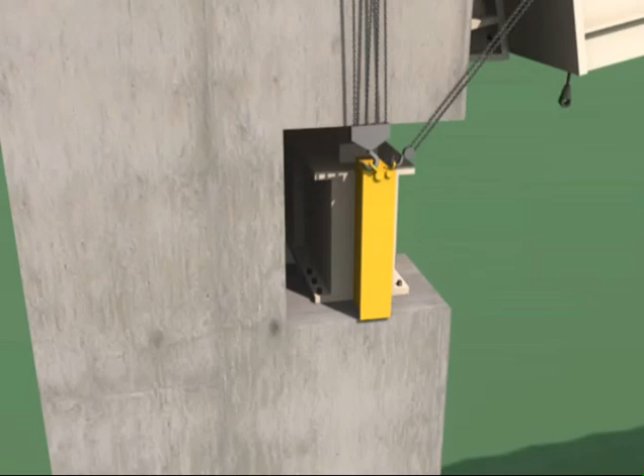Once this process is complete, the entire roof structure will be lowered into its final position upon the transfer girders. When we lower the truss system on top of these transfer girders, then it's time to start relaxing a little bit. Hey!

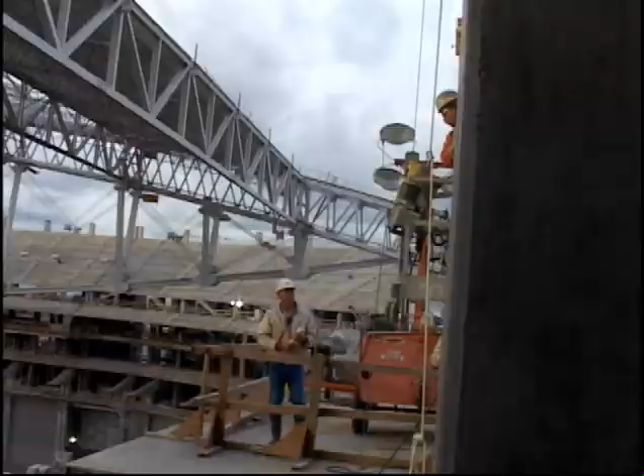Are you even down? Before the ironworkers could relax, they would embark on perhaps the most challenging task of the lift process. Crews would need to position themselves on all sides of the transfer girders in order to have a successful installation. Workers accessed the backside of the transfer girders by rigging 4 sky climbers. They moved into place with ease via the super column channels that previously housed the strand jack cables. Crew members tethered to the trusses manned the come-alongs, while others on temporary scaffolding operated the chainfalls.

Ironworkers, by their very nature, are very competitive people. They're high-spirited. They like doing what they do. They build these buildings and take a lot of pride in what they do. I predicted it to one of the project managers. I said, I can see this coming. There's going to be a contest to see who can go in first, and that's how it went. I mean, these guys were in there. They were working their tails off to get these things in first, second, third, and fourth. And, you know, there was no prize at the end, but the pride of who did it first, and I think they really enjoyed that.

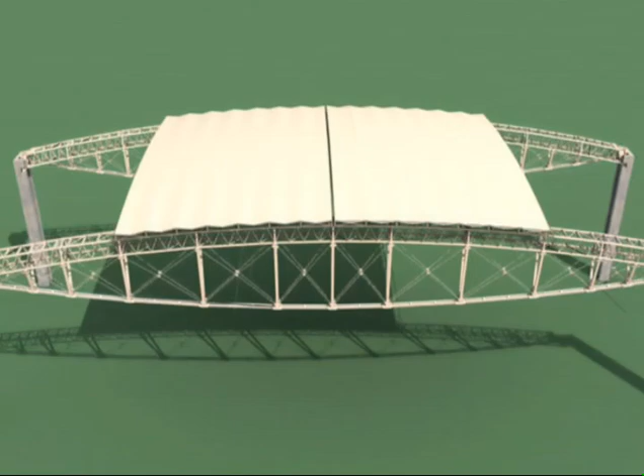With the transfer girders welded into place, the 700-foot-long, 11.2 million-pound roof assembly finally touched down into its final position. As the backbone of the roof structure, the successful installation of the Brunel trusses set the table for the roof to be completed with the placement of secondary trusses in the months following the roof lift.

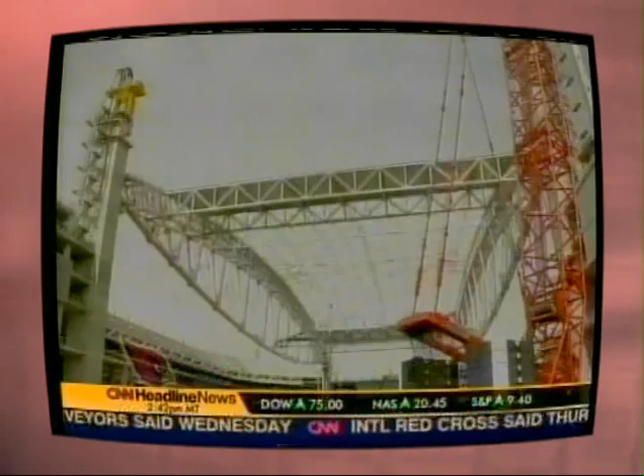What you're about to see is one of the marvels of modern engineering and stadium building. Cardinals are getting a new stadium built in Arizona just outside of Phoenix, and yes, it's the ultimate raise the roof party. It's being called the largest single roof lift in North America. What began as a 3-day project ultimately took a little over 4 days to complete. Even though the lift took longer than originally anticipated, it was praised as a highly successful endeavor.

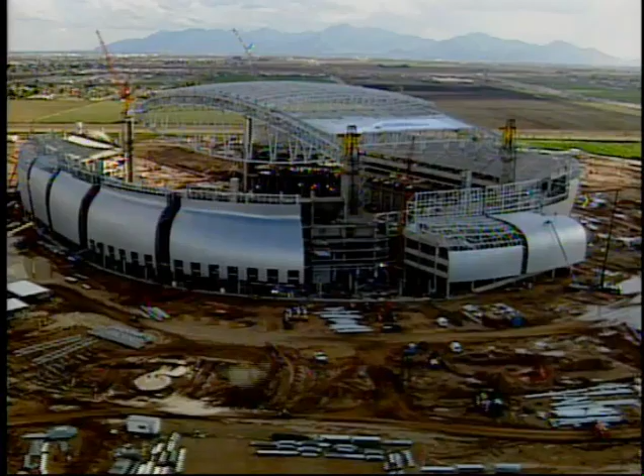Well, I've been working on it for a couple of years now, and this is the first time I've seen it up in the air, and it's awesome. It's just awesome. You're not going to see anything like this again. Well, it's kind of a dream, lifetime dream, you know. You don't get a chance to do one of these every couple of years, you know. This is probably the biggest one project we've ever done, and we're just real happy to be a part of it. Watch it come together on paper, and then you watch it being planned, and then you watch it go together on the ground, and then you actually see it happen.

And all the man hours of planning that went into it, it's very satisfying to see it come together and be a success. We see this stuff all the time, but we don't see this magnitude of lifting and these spans, and this is as exciting as it gets for us. After the weekend was over, it was really the first chance I had to see it in the daylight, and it was quite a sight. You know, being here all weekend long on all the concourses running around inside the bowl. It's a different perspective once you get outside. It's just amazing. For us, this is a Super Bowl. It doesn't get any better than this. This is just a terrific, unique piece of work that we've all had a great opportunity to really do something different and have your plan come to fruition and be successful.

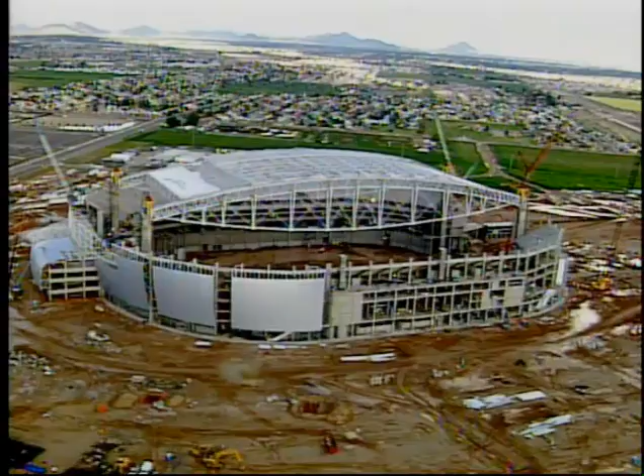With the SuperLift in the rear view mirror, construction officials could relax momentarily before they shifted their focus to the completion of the stadium. It took us to a second phase of construction, which is what we call the finishing touches. We're now trying to finish up the roof and finish up the exterior, getting closed by the end of the year, and give us the last 10 months to do interior finishes and get ready for the August '06 season. When this trend-setting stadium opens its doors for the first time, it will set a new standard that will be copied and admired for years to come.

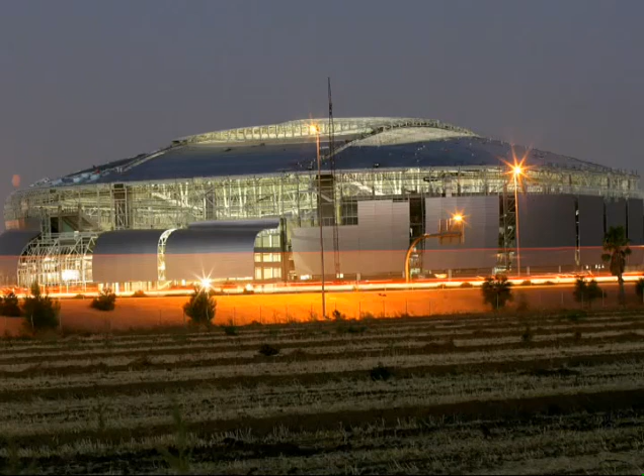It blazes some new territory in what the image of an NFL building might be. It's got the sliding field. It was a different way to do an operable roof. It has simplicity, which I look at a lot as to how can we accomplish more things by keeping things simple, less costly, and then how can we do more with that? And I think this building is evidence of that.

Important stadiums are copied, and so we'll see stadiums all over the world that have echoes of this. It'll be one of the stadiums that provides a kind of model for the next generation of stadiums all over the world. Time is the test for these kinds of projects. And how will history record this moment? I think pretty well. I think 100 years from now, this will stand the test of time. And I think that's what we're looking for, a stadium that wasn't just new and exciting today, but what will be new and exciting 100 years from now.